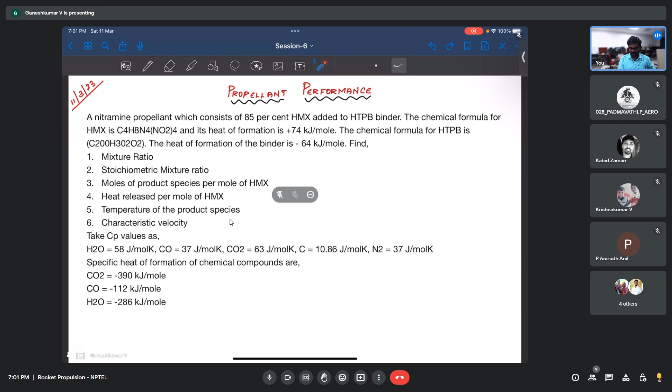I had a talk with the professor, and he gave me a few explanations, which I will share with you. It looks like all three questions are right, and whatever we thought is also right. There are some tricks they followed while making the questions, so it got a little tricky when we looked at it. Let me quickly go through these questions.

So first is question 22, I believe, about the thrust. Let me explain it to you.

The thrust will be maximum when we have optimally expanded the nozzle. So the question actually says the thrust would be maximum in the facility when it has been expanded to optimum expansion through the nozzle, which is 0.02 megapascal.

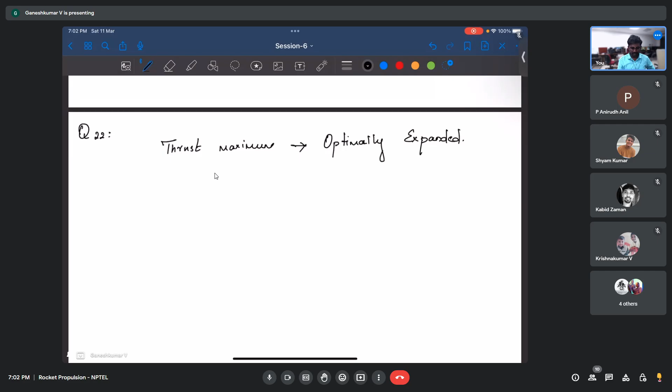Let me quickly show that question also. Yeah, this is week 5, assignment 5. So this is question 22. If you look at it, the thrust developed in the test facility be greater, lesser, or equal to.

Even I tried to attempt it, and it looks like I also got the question wrong. Anyway, the thrust developed in the test facility would actually be greater for optimal nozzle expansion in the facility, which is up to 0.02 megapascal, than if we had an over-expanded nozzle. That is what the question is about.

That is the intention of making the question. It's about the adaptive nozzle. If you adapt the nozzle such that your exit pressure is equal to 0.02 megapascal, you are going to get greater thrust. So greater is the correct answer. But there is this issue that this is designed for optimum expansion for an ambient pressure of 0.01 megapascal. It is already designed.

And in this particular question, it asks would the thrust developed in the test facility be greater, lesser, or equal. There is no mention of whether it is optimal or anything else. So we will be confused. It has, yeah, you are right, it could have been stated better.

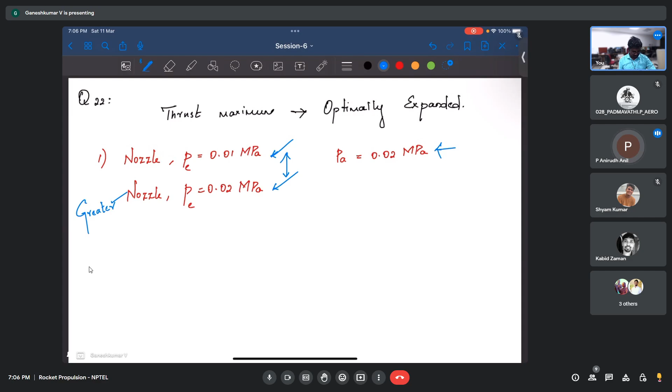Could you explain it using the equation of thrust? Yeah, so thrust equals m dot into Vj plus (Pe minus Pa) times Ae. This is the thrust, right?

So let's say this is the first case and this is the second case. For the first one, thrust is m dot into Vj plus (0.01 minus 0.02) times Ae. For the second one, it's m dot into Vj plus (0.02 minus 0.02) times Ae. Comparing these two, which is going to be greater?

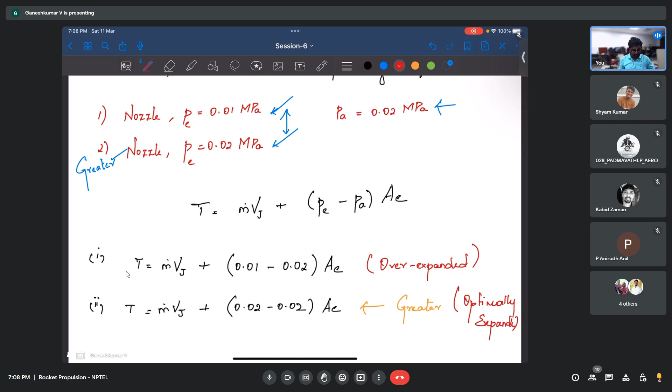Because this one has optimally expanded and this one has over expanded, the over expanded thrust is going to be less. Does that make sense? Yes. So greater is the correct answer for the optimally expanded case. I agree the wording should be corrected a bit, but I don't know whether it can be changed - that's up to the professor. But what's actually meant is that at the end we are comparing the overexpanded thrust with the optimally expanded thrust.

So would the thrust developed in the test facility be less than, greater than, or equal to the thrust produced for the optimal case? We are comparing the overexpanded thrust to the optimally expanded thrust. The overexpanded thrust should be less than the optimally expanded thrust. Yeah, the entire wording doesn't quite make sense - that's why I made that comment.

The wording is not quite explicit. It doesn't read like a fill-in-the-blank statement - it's more like a question, asking would the thrust be developed. So you are right, the wording should be corrected, but if you need marks for that, you may need to make a request.

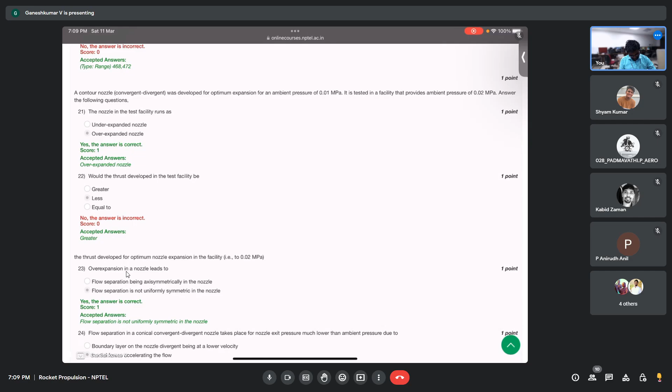But the underlying concept you should be clear on: only for optimal expansion are you going to have greater thrust. What would be the comparison with the under expanded case? Can you add that please?

So let's say if you have an under expanded nozzle, what happens is this term is going to be positive - let's say you are expanding till 0.03 megapascal. This pressure thrust will be positive, but you have to note one more thing: the Vj doesn't remain the same for all these cases.

In fact, for over expanded and optimally expanded, Vj will also change. Over expanded is trickier because there's going to be a shock which reduces the overall thrust by a large amount, since after the shock you get subsonic or lower velocity flow. So for an under expanded nozzle, you're also going to have less thrust because of the velocity.

Let's say for the same exit pressure, if you look in terms of efficiency - how much you converted the chemical energy to velocity or kinetic energy - the under expanded case didn't expand fully to the ambient pressure. So Pe by Pc is not sufficiently low enough, which is why Vj is low enough. So if you just look at this equation, you might think under expanded gives greater thrust, but that's not the case because Vj also gets affected.

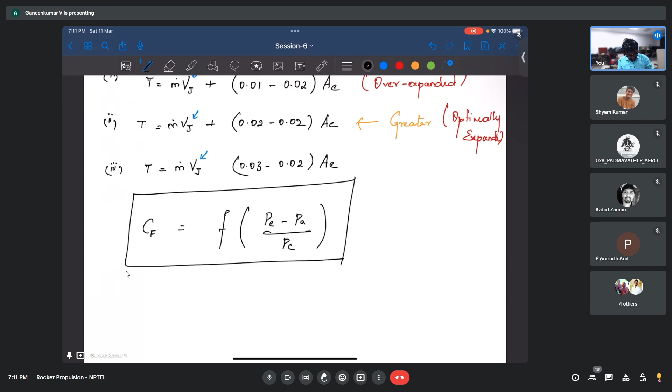What you have to consider is the thrust coefficient, which we derived - it's a function of (Pe minus Pa) by Pc, plus additional terms. This hasn't been covered, so if you're interested you can look it up. If you optimize this thrust coefficient and plot it for varying pressures, you'll see only optimal expansion gives higher thrust. Even if it is under expanded, you lose some pressure because you didn't effectively convert all the chemical energy.

That is something which has not been derived in the class, and you can go ahead and derive it.

So in this course, CF has been defined as some sort of transfer function. C star is a transfer function. What is CF? CF is... thrust is nothing but... sorry, CF is m dot by PCAT, if I remember correctly.

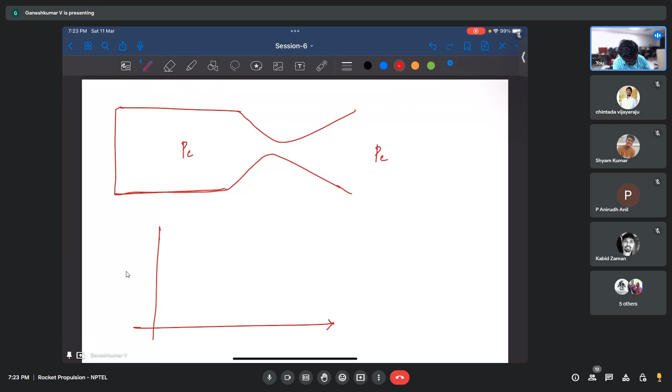Okay, there will be, to have a choke flow, if you plot that graph, this is where actually I'm coming. This is m dot, this is PC by PE, right? So in order to have choke flow, it's going to be like this. This is how it varies. So if you have this as P by PC, actually.

So as and when this pressure decreases, to quickly answer your question, it depends on chamber pressure and the exit pressure, the ratio. So for that, it depends on ratio. For that ratio, you are going to have a certain mass flow rate, a choked mass flow rate. And so what was your question? I lost track of your question.

Yeah, my question was what would determine the PC and TC to ensure that the throat is always choked, or choked during most of the flight? Right.

See, for a given pressure ratio, you are going to have choke flow. You need to make sure that it is not... let's say if you think about it, initially PE is equal to PC. There is no explicit pressure gradient. Yeah, so it is not a pressure value, it's a pressure ratio. That's what I'm trying to say.

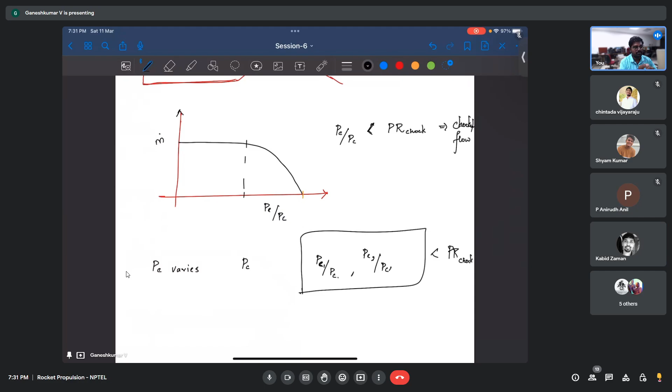And the third is you're concerned with safety, right? So you won't go for over expanded. In case the flow is not choked, the thrust will also be, I think, non-existent, basically zero. It will be totally affected. The velocity would be very less. If it is not a choke flow, your velocity is going to rise like this.

This is the center line, right? It's going to rise and then decrease. You do not want low velocity, you want this high velocity, right? This is not choked. That's why you go for choke flow. You need to increase it as much as possible.

All right, so the second question was the flow separation, right? So it was like we discussed only. So basically, if you compare two flow separation processes, let's say in a conical nozzle, the flow separation in conical convergent divergent nozzle takes place when the nozzle exit pressure is much lower than the ambient pressure, which means there are two cases if you consider.

So PE less than PA. Similarly there is one more which is much less than PA. I'm exaggerating, much less - it's not much less. Let's say PE is 0.5 times PA here, and here PE is 0.2 times PA.

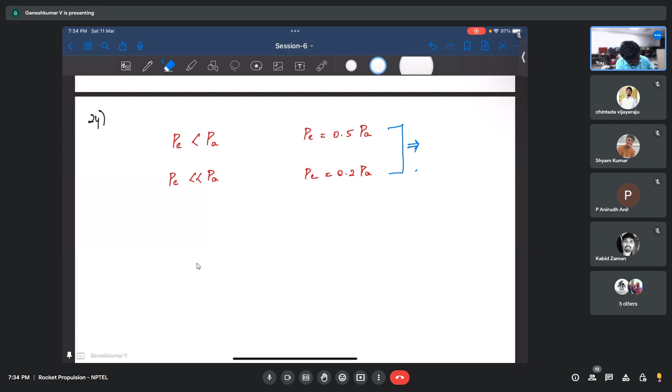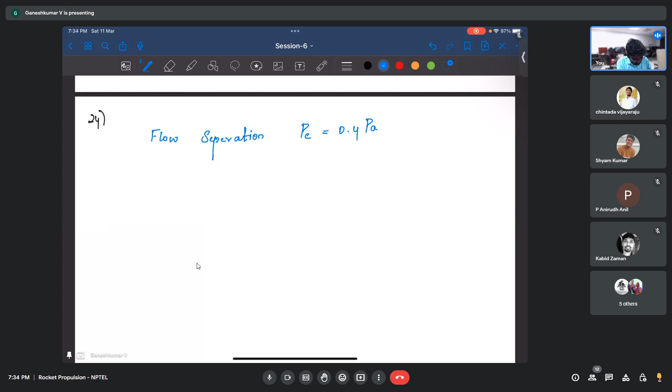Let's say a flow separation happens for one case where there is a Summerfield criteria: PE is 0.4 times PA. That is what the Summerfield criteria tells. So is this for conical nozzle or contour nozzle? It is for conical, I guess. Yeah, conical nozzle. So this is for conical nozzle.

Now, if the flow separation happens, let's say at 0.2 times PA. Let's say if you consider PE is much less than PA, flow separation happens at 0.2 times PA. Then what does it mean?

There is another nozzle which says the flow separation happens for a much below ambient pressure. Flow separation happens for much below pressures than ambient. Then what it means, the inertia forces have actually dominated the flow, dominated the adverse pressure gradient.

So flow separation of conical convergent divergent nozzle takes place for nozzle exit pressure much lower than ambient pressure. Initially there is one ambient pressure which is P less than PA, and for that flow separation happens at some point of time. If you reduce it even more and later flow separation happens, it means inertia forces are actually contributing to delay this flow separation.

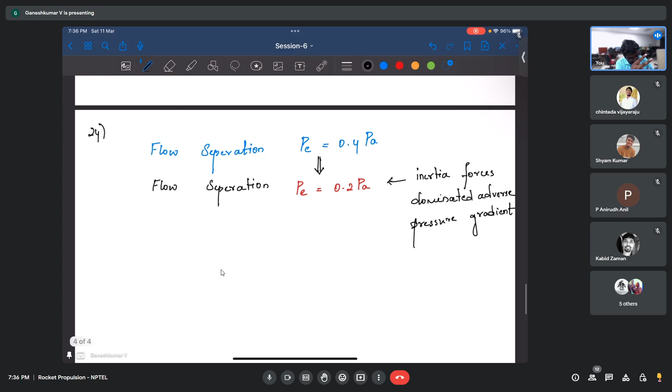So there you need to compare two conditions: one is pressure is lower than ambient pressure. Here you can identify this as PE less than PA, and you identify this as PE much less than PA, which means much lower. So when your pressure is much lower, and at that point if the flow separation happens compared to P less than PA, it is due to the much lower condition having more inertial forces which dominated the adverse pressure gradient.

So that is what you should take from this question. The conical nozzle flow separation takes place for nozzle exit pressure much lower. So again, this is also not well stated, but this is what sir meant.

That's what he said about why it is correct. Actually, sir has given an explanation in which he has also mentioned about this boundary layer not having adequate velocity. So that is true, but this is totally contrary to the answer that has been selected. Boundary layer not having adequate velocity is always present, right? So when a boundary layer does not have adequate velocity, that is what is going to lead to flow separation.

But the flow separation process can be delayed when we have higher inertial forces. That is what you need to understand. So in the boundary layer, you are always going to have low velocity, whether it is high pressure or low pressure, and if your inertial forces cannot overcome it, then only flow separation happens.

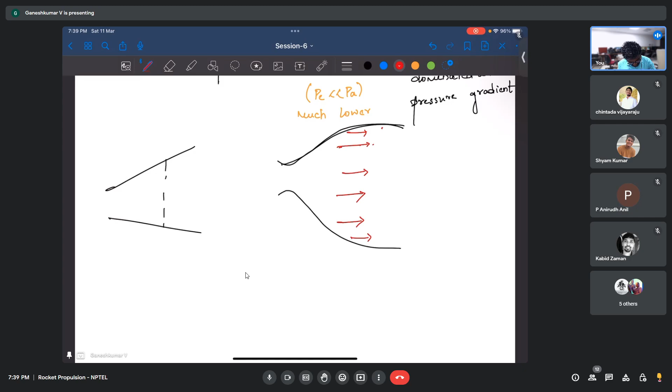Let's say this is the place where PE is 0.4 times PA. Similarly here PE is equal to 0.4 times PA. But there is less chance that the flow will separate here. The flow might separate somewhere here instead. So it has gone below. The reason is you accelerated the flow to a very high velocity.

This is due to inertial forces. It's what actually delays the flow separation. That is the intention for this question. Does that make sense? You need to note this word 'much below'.

So even when PE is less than PA, you are going to have low boundary layer velocity, and if PE is much below also, you are going to have low boundary layer velocity. But when it happens at lower pressure, it means inertia forces have dominated the pressure gradient, or you are going to have higher wall boundary velocity at the places where the inertial forces are dominated, and then you have less chances of flow separation.

Is that making sense? So if the exit pressure is much lower than ambient pressure, flow separation is more likely, or if it is not that low. So when exit pressure is lower than ambient pressure, and there is an over-expanded nozzle, you are going to have flow separation, right? Based on Summerfield criteria or other criteria, there is a pressure where flow separation happens, and it doesn't depend on exact pressure values, it depends on PE by PA.

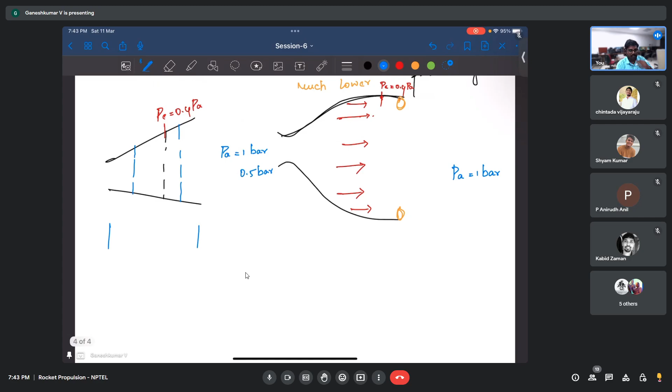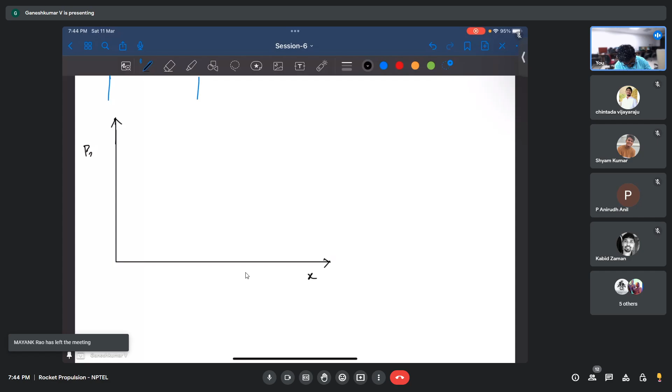Here also ambient pressure is 1 bar, here also ambient pressure is 1 bar, but as per Summerfield criteria, or let's say if you just forget what Summerfield criteria is, if you just plot the pressure, this is along length, let's say this is along x, and then this is pressure, P exit.

So here it is the throat. Your pressure is going to drop till the throat, and then you will continue to drop, and then you will see that there is a high pressure, so you will rise again, and then you will reach the ambient pressure. This is the ambient pressure. So this one is for overexpanded, this is a normal shock. In reality it won't happen, but just for understanding you can think of it like that.

In reality there will be oblique shocks and flow separation happens. This is not a flow separation case. At this point itself you are going to have flow separation. The pressure will rise, but it won't rise like this, and there won't be any normal shock. You will have oblique shocks, and the inward motion of the gases will be happening inside the nozzle itself. All these things will happen, but for understanding you can think of it like this.

Let's say you reduce the ambient pressure, and it will go something like this and then reaches here. So this normal shock gets transferred till it ends here, so at this point it's going to be optimal expansion. Let's say if you keep the ambient pressure constant, and what you are planning to change.

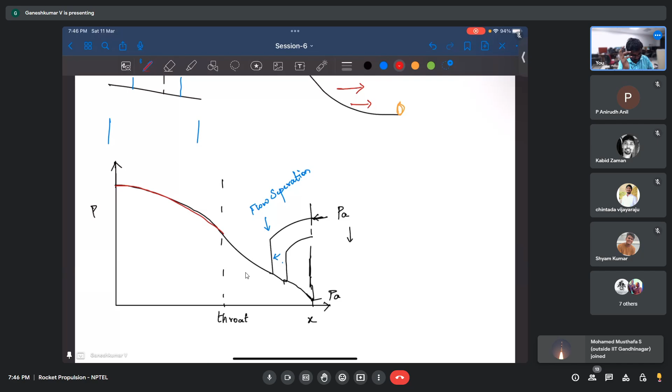If you just look at the divergence, the pressure gradient is going to be large down, right? So at this point it's going to go down, and then flow separation happens, and it will reach the PA. If you look at these two, this is for conical flow separation, and this is contour flow separation. The reason it gets downstream is due to inertia forces which already accelerated.

If you look at it, you have a high pressure gradient, right? So you suddenly expand to a very high velocity within a small distance, and because of that there's going to be high velocity inside the boundary layer, inside the nozzle, and the inertia forces are going to overcome this sudden rise in pressure gradient efficiently. So that's the reason you get delayed, but still there will be flow separation.

At this point, it may not be able to overcome it, that's the reason flow separation happens. But at this point, it has enough inertial forces to overcome the pressure gradient. So here the pressure gradient is like this, which means let's say PA by PCF. This cannot be overcome by conical, but it can be overcome by contour, because of the high velocity we have.

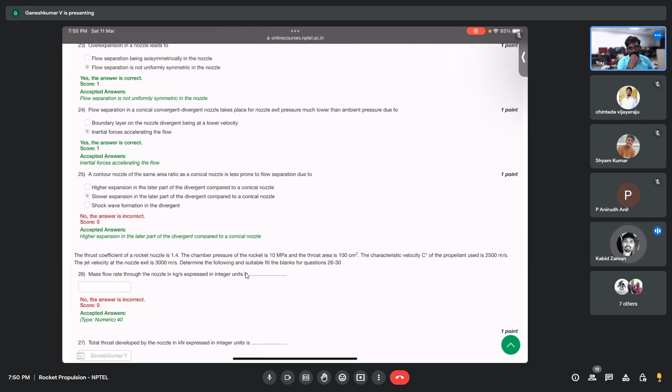Compared between contour nozzle and conical nozzle, contour nozzle can expand to a much lower pressure without going into flow separation, compared to that conical nozzle, right? Correct, correct. Okay, yeah, that is true.

And now coming to 25. By now you should know what is the solution for 25. Like we already talked about, contour nozzle is having high divergence, right? Initially it has high divergence, so the velocity is going to expand more initially, and then there is going to be slower expansion in the later part of the divergence.

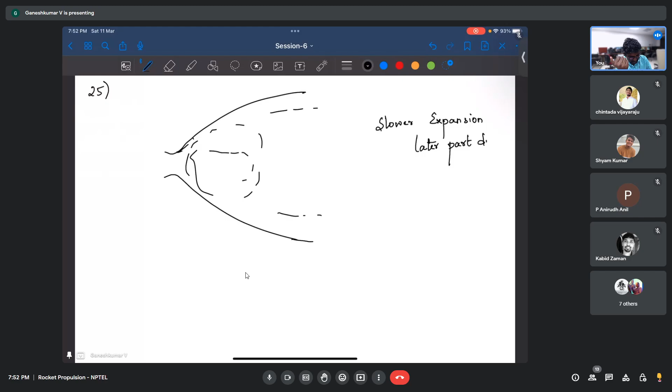So you might probably be wondering, slower expansion in the later part of divergence is the correct answer, right? Yeah. So this has to do something with the boundary layer.

So here you are viewing it in the core region. In the core region, there is going to be very high expansion initially and lower expansion in the later part of divergence, right? But in the boundary layer along the walls, there is going to be...

Initially, if you look at the boundary layer, let's say with a zoomed in view, the boundary layer is going to be small, and suddenly you have expanded to a very high velocity. So your u infinity is going to be very high. So the boundary layer will get adapted to this higher expansion much later. This is the reason: if you have higher velocity, you are going to have higher expansion, right?

But this higher velocity is going to get achieved inside the boundary layer at the later part of the divergent, rather than in the initial part. So in the core region, higher expansion is at the initial part, but inside the boundary layer, the dynamics is a little bit different. To simply explain it, the higher expansion happens at the later part inside the boundary layer. So that is the reason higher expansion is the correct answer.

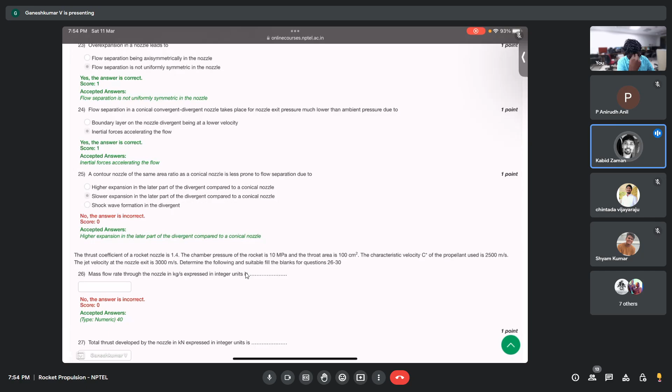But in this particular question, there is no mention of boundary layer or core flow. Exactly, so that is totally confusing. What I'm also wondering is they didn't state which region we are talking about. And even in the lecture, we have not discussed anything related to boundary layers, the growth of boundary layer, or the expansion in the boundary layer.

I have kept the flows to be almost similar between boundary layer and core flow, since we are mainly dealing with the core flow only. In fact, all this flow separation analysis, if you want to talk about in detail, you have to do a 2D analysis. You cannot have a 1D analysis. The 1D analysis just gives the center line velocity, or let's say the equivalent velocity or averaged velocity along a cross section. It doesn't, in 1D you cannot even consider the effect of viscous forces.

When you talk about boundary layer, you need to consider the effect of viscosity, right? So we never did a no slip condition at the wall, walls of the nozzle. So when you talk about flow separation, or when you talk about boundary layer, you need to do a 2D analysis. You need to come up with a 2D analysis. Until we do 2D analysis, we won't be able to exactly say which is better, right?

So in this course, it has not been taught, or it has not been discussed much. But the reason for this to be the correct answer, that is what he said. I'm not sure about how the grading or how it will change, or how you want to go forward with it. Only the professor can decide that. But yeah, I'm just giving you a physical insight, like why it is the right answer.

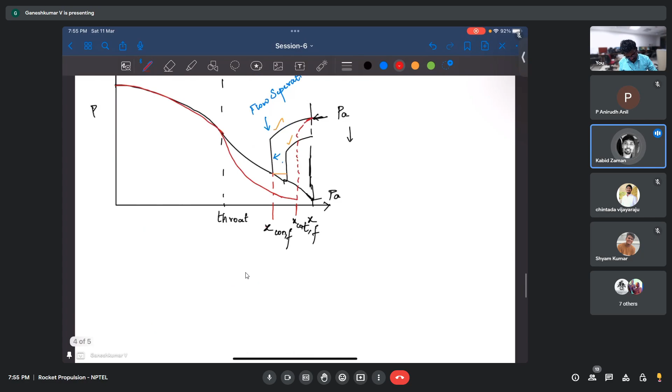So in the core flow, initially there will be more expansion because there is a large deflection of 10 to 15 degrees, and thereafter it is 4 degrees, so it is less expansion, right. So here we saw, there is a high expansion here in this graph.

If you look at it, even if you go back and look at the professor's lecture, he will draw the graph like: if a conical nozzle is like this, the contour nozzle is going to be like this, which means there's a higher expansion initially in the core flow. Actually I made the answer based on that graph only, because that makes sense. I also made the answer based on that, and my answer is incorrect.

Could you please explain that boundary layer expansion once again? Like why it is less at the beginning part and more at the later part?

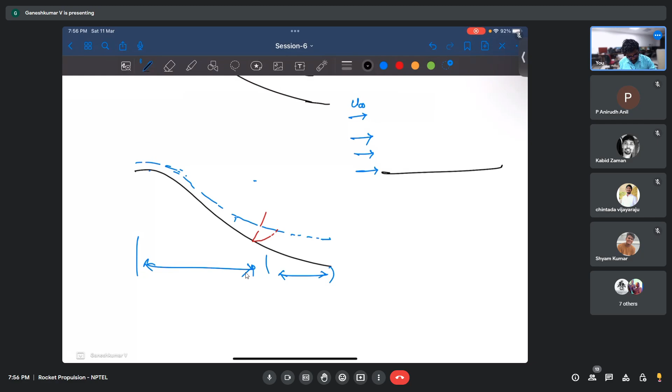So when we do a boundary layer analysis over a flat plate, we considered a lot of assumptions, right? We considered velocity at the far field to be u infinity, and we used to draw a boundary layer like this. But here you cannot make those assumptions. U infinity is a function of x, it keeps on varying, right?

So initially there will be a boundary layer. At the throat there will be some boundary layer, and suddenly you have expanded it to a very high velocity, and the fluid in the boundary layer needs some time for its expansion, because adjacent to the wall the velocity is zero, right? So you cannot change the wall velocity.

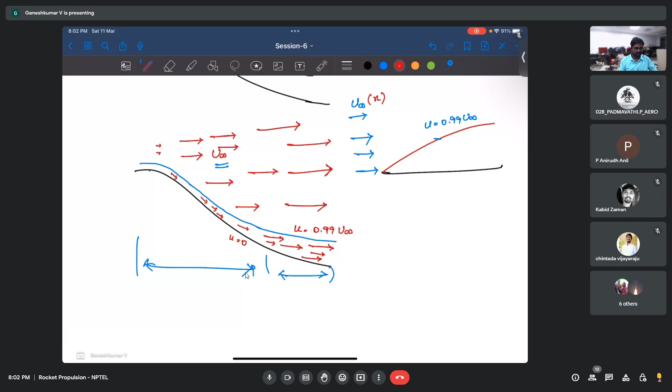Okay, thank you. Is there any other questions regarding last week's assignments or previous weeks' assignments covered till now? In one of the week 6 assignment questions, there was mention of a specific heat ratio, but the answer chosen as correct is specific heat instead of specific heat ratio.

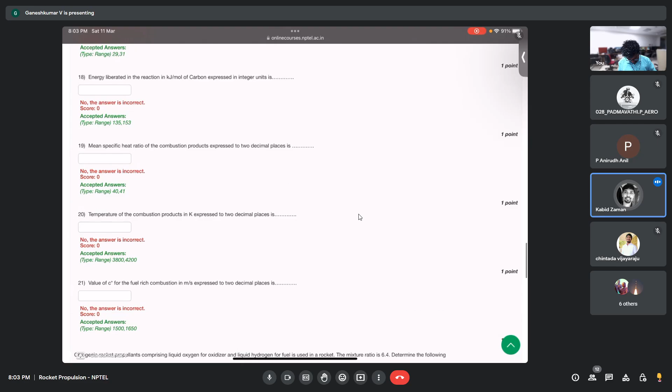Did you look at the solutions? In the solution, it is also giving specific heat ratio, but the answer given is specific heat instead of that ratio. That's not a problem - in the solution you were right, when you see the solutions. No, in the solution also that ambiguity is still there. Let me check - so this is question 19, you're saying it should be specific heat ratio. Let me check it.

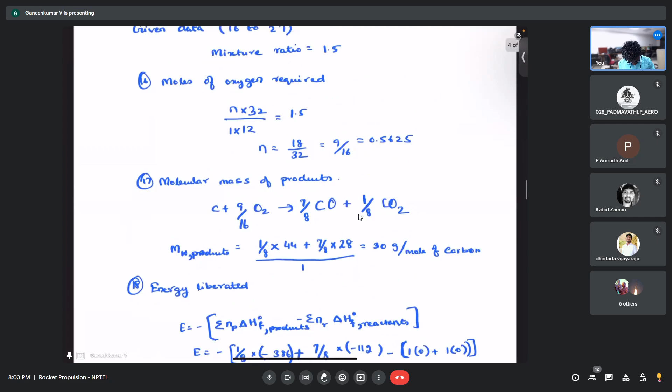Did you raise the issue about it? One of the students, Lakshmi, has raised this issue. Did they get any reply for that? Not yet, I guess. Okay, so that should be corrected.

It's not a problem, it was clearly stated, right? It should be corrected. Question 19 is asking for specific heat ratio, but the answer is a specific heat. So that is ambiguous. But what about 12?

Question number 12, well, it is mean specific heat of combustion. It has given combustion specific heat, right? It's just saying mean specific heat. So do we consider constant pressure or constant volume? It is not mentioned exactly.

Usually we deal with only CP, right? So we should use CP.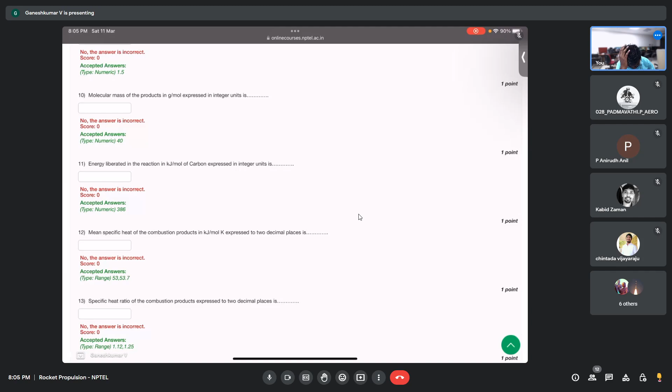Sir, in this 12th question only, the answer is like 53 point something, from 53 to 53.7. That will be in joules. For kilojoules, it should be 0.05. It's given in kilojoules, no? So please make that request also, it should be corrected if possible.

The solutions also give 53 joules, right? Yes sir. Then it's fine, no problem.

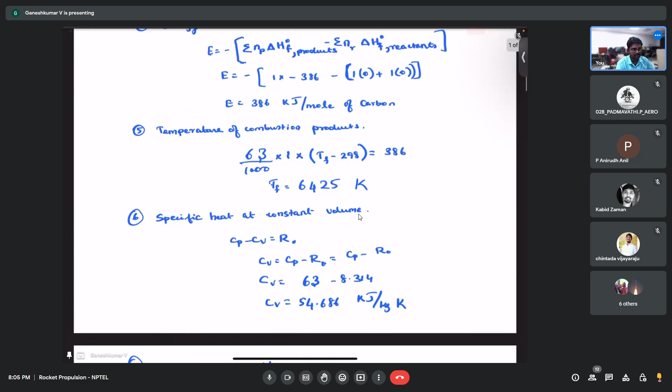So basically to answer the question, mean specific heat is nothing but CP only, you should consider, because CP is what we use everywhere. So usually people drop out the term 'pressure' for constant pressure.

Actually, I saw this 'mean' thing, and I calculated the mean of CP and CV, and that came out to be wrong.

So which one, 12th question, right? Yeah, it is asking for mean specific heat. So I made the assumption that it must be a mean between CP and CV, because neither pressure nor volume is mentioned.

There I made the mistake. It's just mean specific heat is for the product species, it has nothing to do with CP and CV. See, we never have both CP and CV in the same equation, right? If we solve for enthalpy, we will have CP. If we solve for internal energy, we will have CV. So there's going to be nowhere you will use CP plus CV by 2.

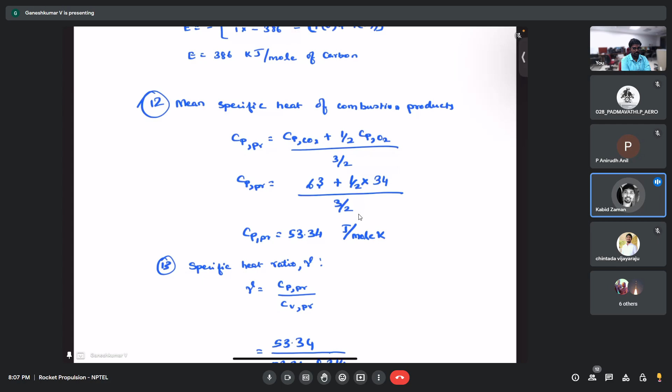So mean in the sense that it is a product mix, specific heat of combustion products, right? So combustion products specific heats mean you need to take.

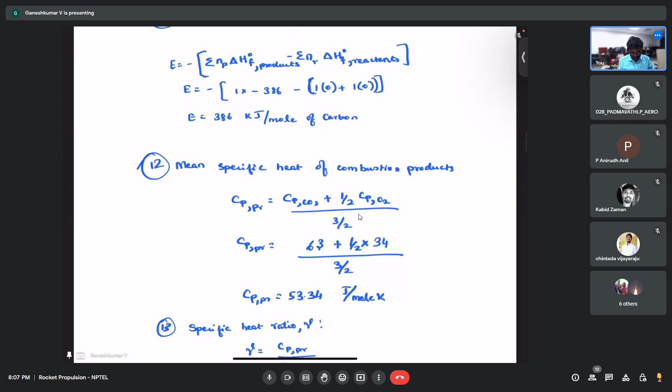All right, any other question?

All right, I think I have one more question here to solve today. I saw assignment 7, I believe it's 7, it was again to calculate the temperature and characteristic velocity of a given propellant. I thought in the last class we rushed a little bit in the later part of the session.

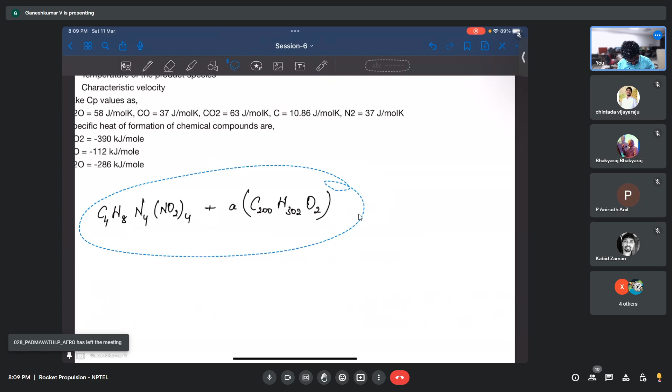Exactly, CO, sir. How do we estimate that? Right, so you have a fuel and oxidizer, and you consider an ideal set of products. So upon combustion, what is the product species you are going to get? You will be getting CO2 and H2O, right? This is the major product species because it's a hydrocarbon, and you are going to get CO2 and H2O.

And sir, since we are considering stoichiometric? No, we didn't consider it yet, but first case, what you can say is in a stoichiometric, you are going to have an ideal set of products. First you consider ideal set of products, and you try to equation, and in addition, you consider all the species.

So in fact, if you do an equilibrium analysis, if you take a combustion course, we would never do this. What we write is, if you want to do this combustion and get the product species, this is going to give us CO2, CO, H2O, H2, O2, H, O, N2, N, OH, H - what else I missed? N2O, then NO2, and what else can we add? We can keep on adding. It's like you can have n number of product species.

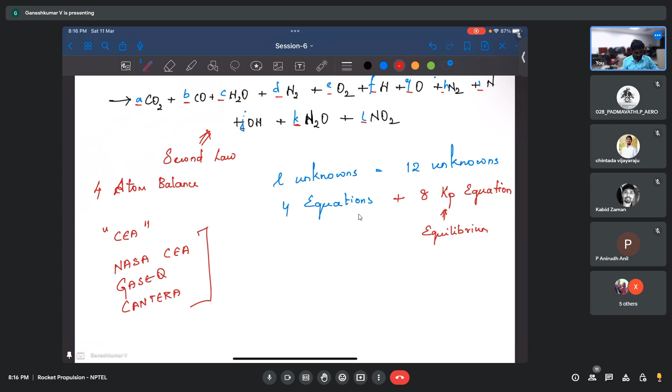Instead, what we did is we are going to take a workaround for this. We won't consider, let's say, O2, H, O, and then N2, NO2, N2O, OH, CO. If needed, we will consider this CO. If needed, we will consider O2. If needed, we will consider N2.

We won't consider dissociation at all, so dissociation is completely neglected. But dissociation is totally going to affect your system if you have high temperatures. We are just taking a workaround in order to get a rough estimate. That is the reason we do this. Do you have any questions?

Is this clear why we are doing this? This is how you properly calculate mole fraction of each and every species. You have to consider all the species available, because you don't know what happens at the end of combustion.

Nature is not bound to give only CO2 and H2O. It works on its own ways, and it is governed by only a few laws, like the first law of thermodynamics, second law of thermodynamics, and conservation principles. So you need to come up with some idea of using these conservation principles in order to predict what will be the mole fractions.

So we won't go into these complications. What we do is we just consider... let me just draw it again. So I just want to make sure this is not the correct way of doing it, but we are just doing a workaround in order to solve it, right?

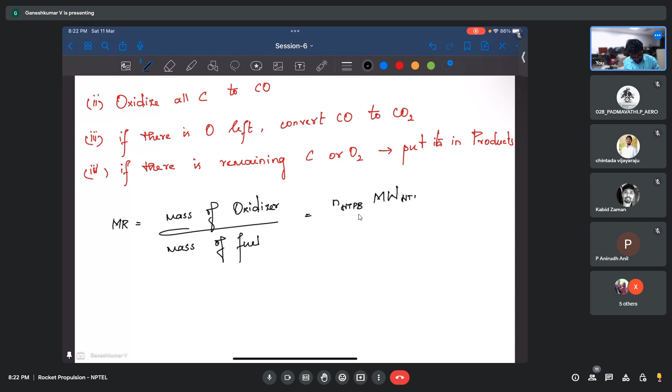Here you consider HTPB to be oxidizer and nitramine to be fuel. So you need to find N of HTPB times molecular weight of HTPB, by N of HMX, molecular weight of HMX.

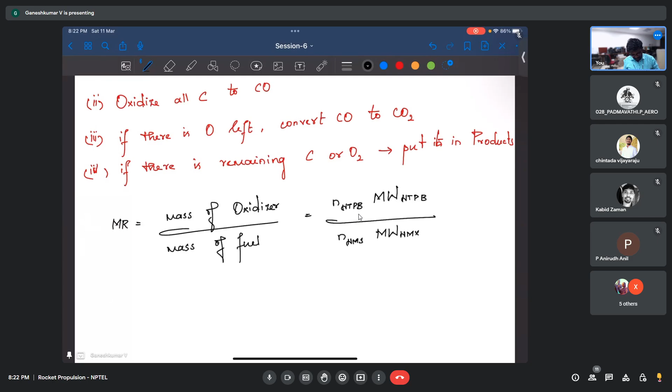Let's quickly calculate molecular weight of HTPB. How much is it coming? It's C200, H302 and then O2, I guess. Yeah, O2. So 200 times 12 plus 302 times 1 plus 16 times 2. So is this clear what I'm doing? How I'm using mixture ratio to find the number of moles?

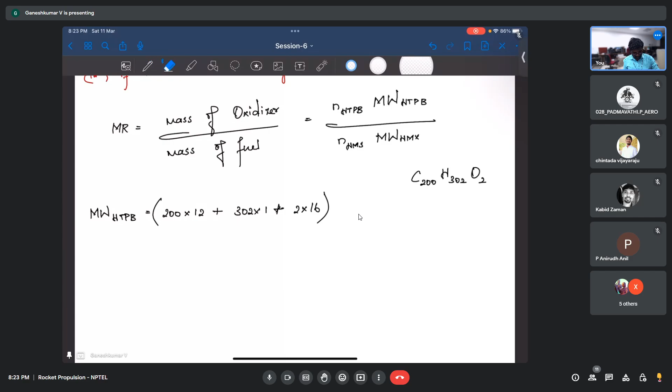Okay, 2734, we have the answer, 2734. What is it going to be? Because when you substitute it elsewhere, you need to convert into kg per mole, which you need to take care of. And then similarly, if you want to calculate HMX, how much is it going to be? By the way, if you have doubts till now, please stop me and ask.

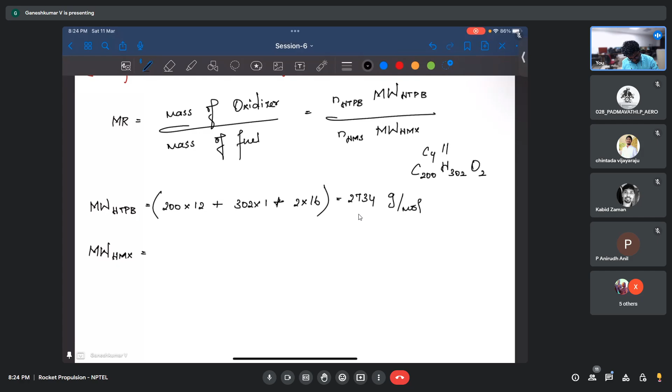It's going to be C4H8N4(NO2)4. Which is it coming to? So it's going to be 4 times 12 plus 8 times 1 plus 4 times 14 plus 2 times 16, right? How much is it? 296. I believe this is right. Yeah, 296 is right.

How do we find n of HMX? So here if you look at the question, everything is per mole of HMX, right? So let's take 1 mole of HMX. It's also best to have 1 mole of HMX and do all the calculations. So we already took 1 mole of HMX, so n of HMX is going to be 1. Now the mixture ratio is given. Oh, is it not given? So we need to first calculate mixture ratio also.

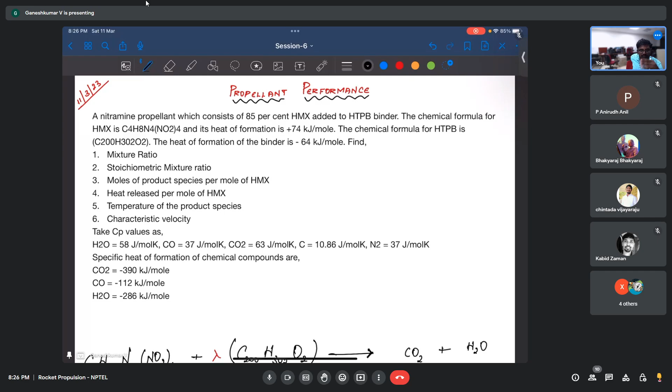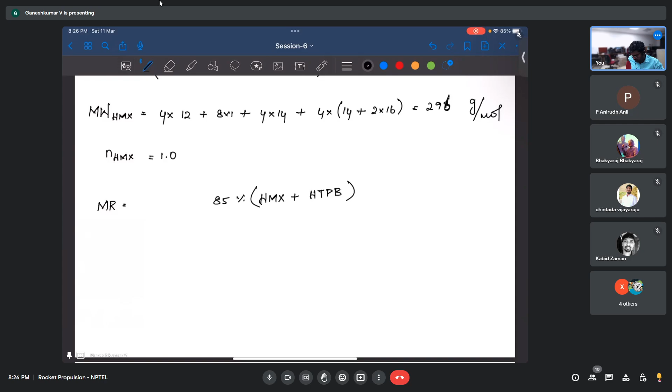It's given 85% is HMX, and remaining is HTPB binder. 85% of HMX added to HTPB. What the question says is it consists of 85% HMX added to HTPB binder, right? So 85% is HMX and remaining 15% is HTPB. So how do we calculate mixture ratio? Is it 85% of HMX plus HTPB, or 85% of HMX added to HTPB?

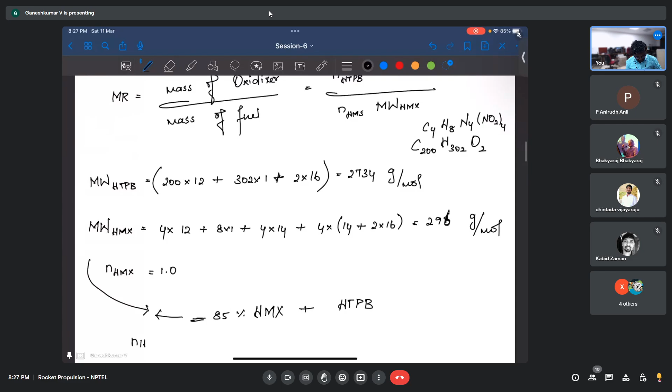So we don't need to calculate mixture ratio also, or if you want you can calculate. I just want, how do we convert this information, whatever information we have, into n of HTPB? That is what I need. How do we calculate it?

Let's say if I want to give a hint, you consider 1 kg of propellant. In that we have 85% HMX, then 15% HTPB.

Which one is the oxidizer here? So HMX is fuel here and HTPB is oxidizer. You can assume it to be like that. In fact, if you calculate in terms of oxygen, it depends on mixture ratio. Based on that, fuel oxidizer varies. It doesn't matter right now, but how much of HTPB I need, how much of HMX I need for a given mixture ratio. Now you consider HTPB to be oxidizer and HMX to be fuel.

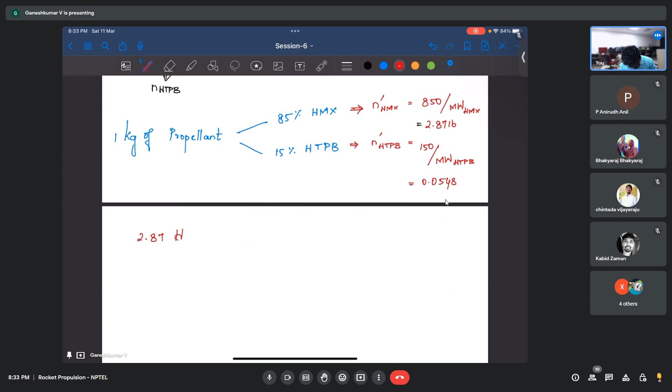So 2.87 moles of HMX reacts with 0.05 moles of HTPB. That is what this 85% and 15% is corresponding to, right? Then let's write it: 2.87 moles of HMX reacts with 0.0548 moles of HTPB.

Then I want to have 1 mole of HMX. If I have 1 mole of HMX, it reacts with 0.0548 divided by 2.87 moles of HTPB. So we know N of HMX to be 1, we consider it N of HMX, for which we are going to do all the calculations. And now we have N of HTPB, which is nothing but 0.0548 divided by 2.87. This is how you calculate moles of HTPB.

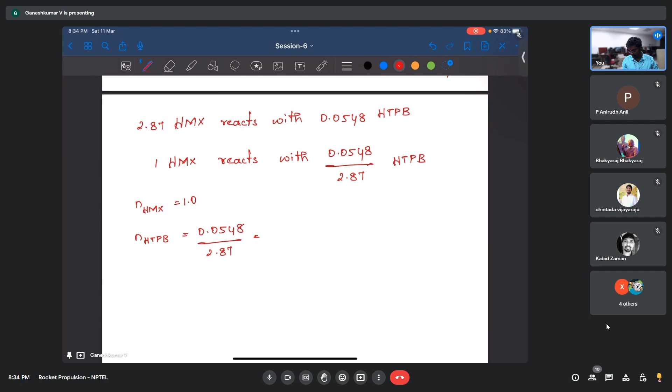Is this clear? It comes from the mixture rule, right? So what you know is the mass ratio of oxidizer and fuel. Based on that, you need to calculate the N moles. Which it is coming out to be... I'm getting 0.019. Is that confirmed? Yeah, it's correct. Is this clear how we arrive at this result?

Is there any other way you could arrive at this result? How about if you write mass ratio to be mass of oxidizer by mass of fuel? Can we just simply divide 85 and 15 percent, 15 divided by 85%? It is giving the same result. Yeah, that is also true. You can try like mass ratio, nothing but 0.85 to 0.15. Is that what you're telling? Yeah, exactly, so this is a mass ratio.

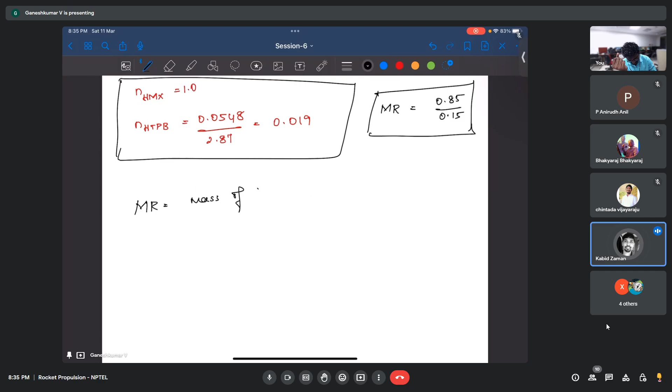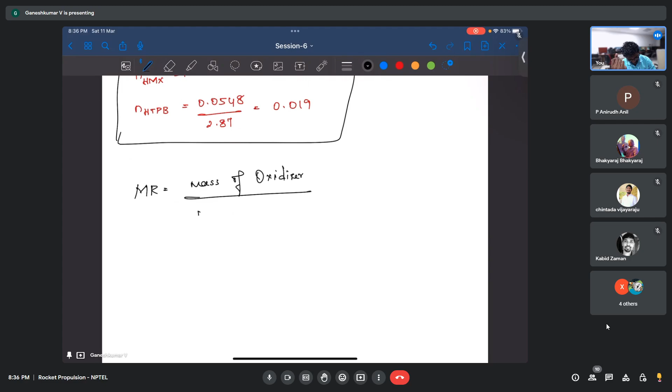In fact, mass ratio for this reaction. But I didn't get why 0.85 upon 0.15. See, what is mass ratio? It is the amount of oxidizer to the amount of fuel. It should be the reciprocal of that actually, 0.15 divided by 0.85. So in order to answer your question, it's mass of oxidizer divided by mass of fuel. What we know is mass of propellant is nothing but mass of oxidizer plus mass of fuel.

Yes sir, so I am telling 85% of the propellant is oxidizer, sorry, 15% of propellant is oxidizer, which is 0.15 times mass of propellant. And I'm telling 85% is fuel, so 0.85 times mass of propellant. Now what happens? Mass of propellant cancels. Okay sir, got it.

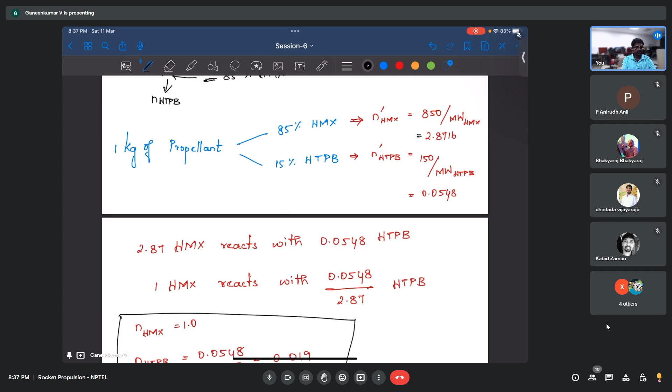So you can simply do this N of HMX, and you can end up getting the moles of HTPB also. This is also a way, but if you want to think a more logical way, you can also do it this way. You can take 1 kg of propellant and see how much division we have in terms of moles, and that is going to be applicable for any mass of propellant.

Anyway, so we found that out, now let's try to balance it. That is important, right? So we need C4H8N4(NO2)4 plus 0.019 times C200 H302 O2. Okay, now what did I say? I need to first oxidize all the H2O.

So first let's try to find out what should be the coefficient of H2O. So I have how many H atoms?

H atoms: I have on this side 8 H atoms plus 0.019 times 302 H atoms. Is this clear? So that gives 13.738, okay, so around 13.73 H atoms.

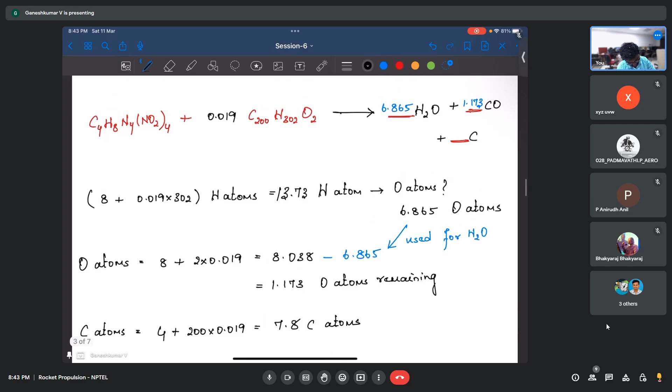So in this 7.8 carbon atoms, I'm going to subtract 1.173 atoms to form CO. So the remaining would be, how much would be remaining? So 6.627. Yeah, wonderful, so we have 6.627 carbon atoms remaining.

Okay, and so this is going to be 6.627. You need to note that we are eliminating the oxidation of N, like N is an inert species here. It doesn't oxidize, it doesn't react to form product species like NO or N. In reality it does, that's where NOx emissions and emission rules come from, because NO will be produced, but for our analysis we'll just ignore the oxidation of N.

So what will be the moles of N remaining? Because we have N here, right, so there should be N on the product side also. So how many moles would be remaining? We have 4N here and then another 4N here, total 8. Is this clear?

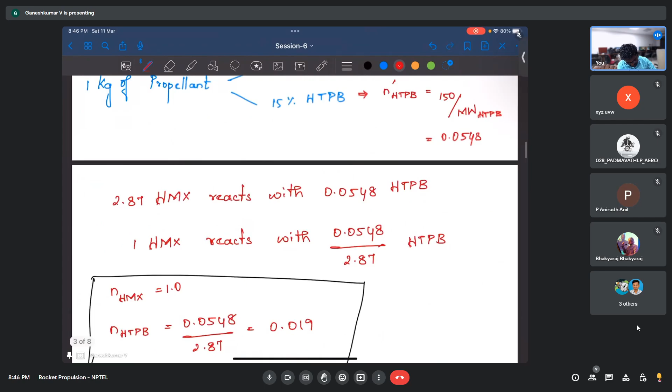So, of HMX that we need to find out, what is the heat release per mole of HMX, or you can say the heat of combustion. It's called heat of combustion. What is the heat release per mole of HMX? What is the formula for that?

It's going to be the summation over reactants of Ni, H naught F of Ni — summation over reactants, N of reactants, where i is the reactant, and H naught F of reactants — minus summation of Ni for products.

You remember this formula? It's just formation enthalpy - the difference in formation enthalpy upon forming this at a constant temperature or standard temperature of 298 Kelvin. That's why all these Cp's will disappear, because you no longer need to raise the temperature from 298 to some other Kelvin.

So when you calculate the heat of combustion for any reaction, you need to calculate how much heat is released at constant temperature and pressure, in this case 298 Kelvin and 1 atm pressure. The definition of enthalpy of combustion, or energy released per kg of propellant or fuel, is always at these standard conditions, and that's why we use formation enthalpies here.

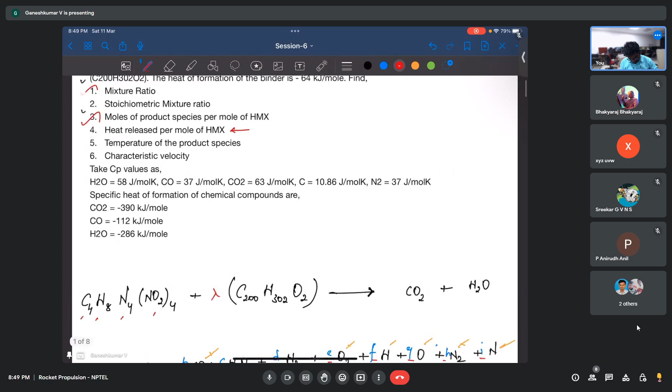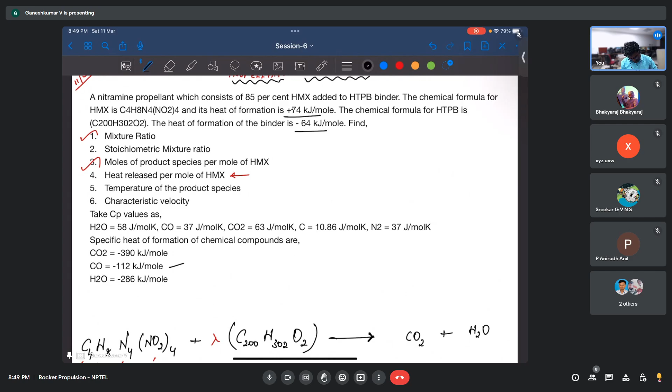Then you can calculate it. It's going to be HMX - how many moles of HMX do we have? We have one HMX and 0.09... HMX is plus 74, plus 0.019 times HTPB which is minus 64, times minus of moles of H2O.

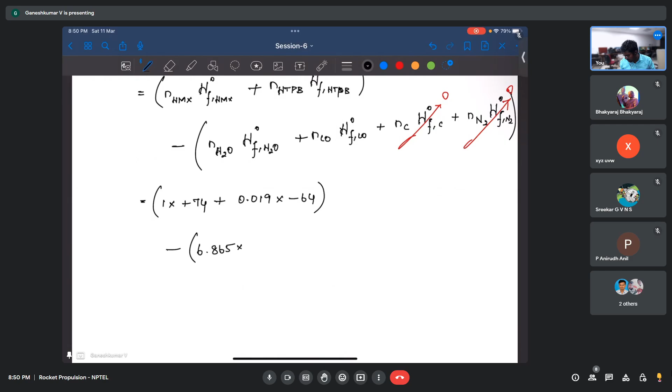How many moles of H2O do we have? 6.865 times moles H of H2O, which is minus 268 - I guess minus 286 - and CO is 112, minus 286, then minus 112. How many moles of CO do we have? 1.173.

Okay, can you guys quickly calculate delta HC? Then next is temperature, which is delta HC you're getting. Calculate it.

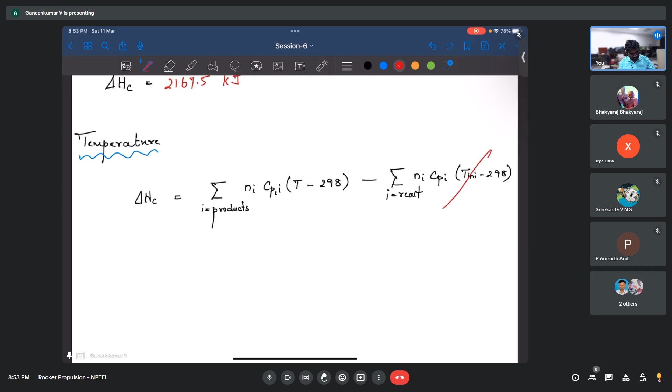Ni of Cp, T minus 298, plus minus summation over reactants, Ni Cpi of... so the initial temperature T initial minus 298. Here we will consider initial temperature to be 298 only, so this part is going to be 0, so this whole part would be 0. So this equation simply simplifies to delta HC, which we already know, 2167.5 times 10 power 3.

It's nothing but N of H2O times Cp of H2O times T minus 298, plus N of CO, Cp of CO times T minus 298, plus N of C, Cp of C, T minus 298, plus N of N2, Cp of N2 - so why is it 0? That's the reactants.

Yes sir, here the initial temperature is already at 298 - because it is already at 298, T initial we are assuming it to be 298 Kelvin. I think I didn't give it in the question, but the initial temperature is actually 298 Kelvin, all the propellant is at 298 Kelvin. That is the reason this is 0 - if not, you would need to consider that.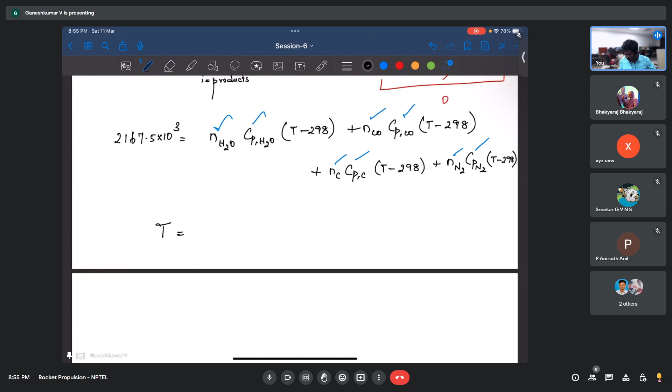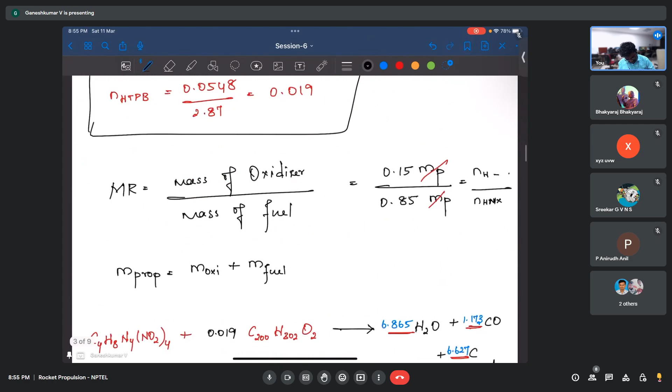So you know all these things - you know N, you know Cp, all the N's and Cp's, which is also given in the question. You just need to find temperature here. Again in the interest of time, I am giving you the temperature - please cross check it, I didn't solve for temperature, you can solve and let me know what it is. Then remaining is characteristic velocity - once you find temperature, what else do we need to do to find characteristic velocity? We already covered this in the last lecture, last session, right?

Characteristic velocity requires, it's actually a function of molecular weight, temperature, and gamma. All these three you need to calculate. So for that you need to know the molecular weight. How do you find the molecular weight of the mixture?

N of H2O times molecular weight of H2O, plus N of CO times molecular weight of CO, plus N of C times molecular weight of C, plus N of N2 times molecular weight of N2, divided by N of H2O, N of CO, N of C, and N of N2. This is how you calculate molecular weight.

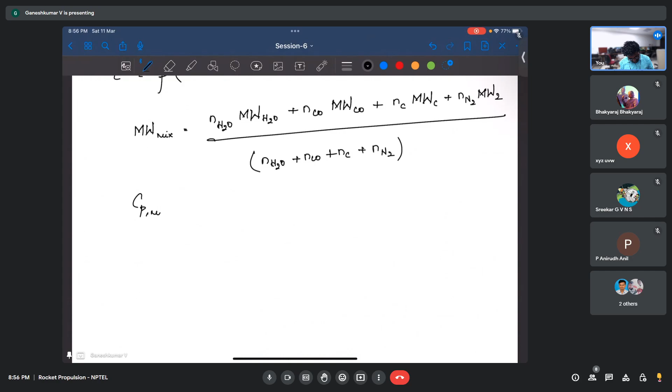Similarly, you need to calculate Cp of mixture, and then you know R. What is R? R is nothing but R naught divided by molecular weight of mixture. Once you find that, you can find Cv of mixture, which is nothing but Cp of mixture minus R. Gamma is nothing but Cp of mixture by Cv of mixture.

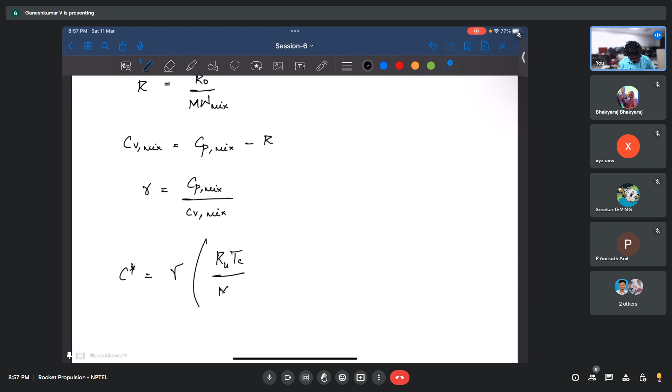Once you find all this, you can put it into the C star equation, which is going to be a function of all these. I believe there's a big capital gamma times, I think it's R T C, or R naught T C by molecular weight, to the power gamma plus 1 by 2 times gamma minus 1. I'm not sure, please recheck this equation again.

Okay, there's no gammas here, it's just 1 by 2, root RTC upon capital gamma. So it is root RTC upon capital gamma. It's 1 by 2 I wrote, but yeah, both are the same.

And this capital gamma is going to be square root of gamma, times 2 by gamma plus 1, to the power gamma plus 1 by 2 times gamma minus 1. Sure, the capital gamma is in division with the root RTC. Is it? Okay. Yes sir. Now is it fine? Yes sir.

Just need to find all these things. So the only first important thing, if you make a mistake, is if you make a mistake in calculating the number of moles, then all other calculations will get affected. So you need to be very careful in doing this calculation.

It's just balance, how much O you are going to put here, how much O you are going to put there. It's like filling the bottles - first I will fill the smaller bottle, then I will fill the bigger bottles, like that. Initially you fill everything with H2O, fill everything with CO. If remaining is there, you put it in CO2. If nothing is remaining, then you keep it as O2.

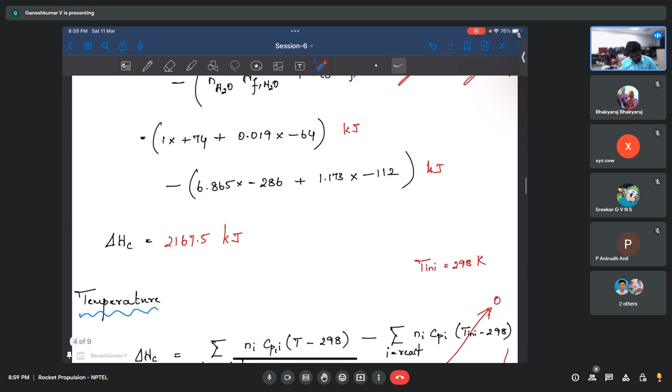If I don't have enough O to oxidize CO, keep it as C, right? If I cannot even oxidize H2, H also appears as H2 on the other side. So that is how your thought process should be. Once you do that, all these things are trivial, you just need to calculate all these things.

Is that clear? So maybe I will take 2 more minutes to find how do you find stoichiometry. Stoichiometry, I think the spelling is right. Anyway, so if you want to find the stoichiometry, what does stoichiometry mean? You need to consider the ideal set of products. So here we have C4 H8 N4 (NO2)4,

plus some lambda of C. This is lambda stoichiometric, let's call it lambda star, times C200 H302 O2. It should give you the ideal set of products in a combustion reaction. What is the ideal set of products? It should give you CO2, it should give you H2O, and it should give you N2. There shouldn't be any other dissociation of the products or anything else. The ideal set is CO2, H2O, and N2 - it's not even CO.

So now if you just balance the carbon atoms, let's say if you want to balance carbon atoms, it's going to be 4 plus lambda star times 200 is equal to, let's call it A, B, and C. Okay, now we have A.

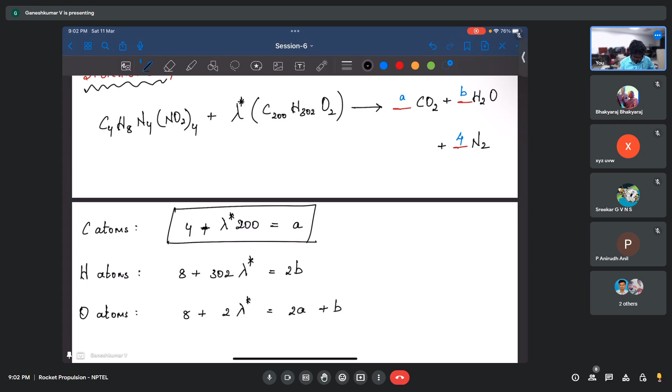So for the H atom we will have 8 plus 302 times lambda star is equal to 2 times B. And then now we have the O atoms. O atoms: we have 8 plus 2 times lambda star is equal to 2 times A plus B. Now you have how many equations? 3 equations. And what are the unknowns we have?

So it's just an algebraic equation, and the unknowns are A, B, and lambda star. You can easily solve these two and get lambda star. Once you get lambda star, you can find the mixture ratio, stoichiometry.

Okay, so this is how you find it. I just thought I'd give you some interesting insight about stoichiometry. So once you find the stoichiometric mixture ratio, you can compare it with the present mixture ratio. Let's write it out. What is the present mixture ratio?

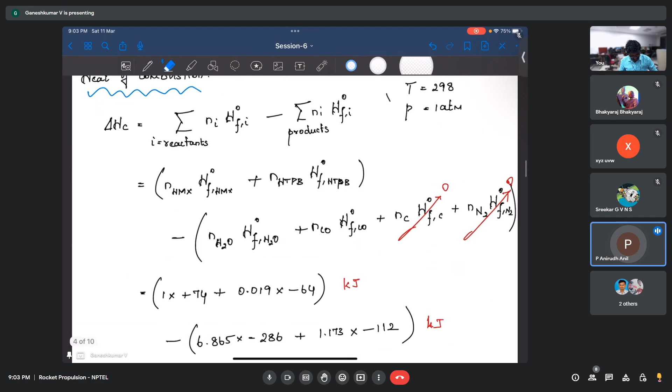So could you explain again about stoichiometric? Yeah. So in stoichiometric, what happens? We have an ideal set of products, right? Is that clear? In stoichiometric, we will have an ideal set of products. We won't have any dissociations. Like CO2 cannot dissociate into CO and O2, or H2O cannot dissociate into OH and H. Okay, that you should remember.

And the ideal set of products are CO2, H2O, and N2. So let's say if you have a perchlorate, ammonium perchlorate, the ideal set will also include HCl in addition, because chlorine is there. So CO2, H2O, and HCl - the ideal set becomes that.

Now what you have to do is just balance these. You don't need to do anything else. You don't need to oxidize CO2 first, or oxidize H2O first. All these things you don't need to do, because you don't know what lambda star is, so you can't do that either. You're thinking that if I want to form this ideal set of products, how much oxidizer do I need - that is going to give you lambda star.

So what you do is form three atom balance equations. You form three equations, and you have A, B, and lambda star - three unknowns. This you can easily solve, right?

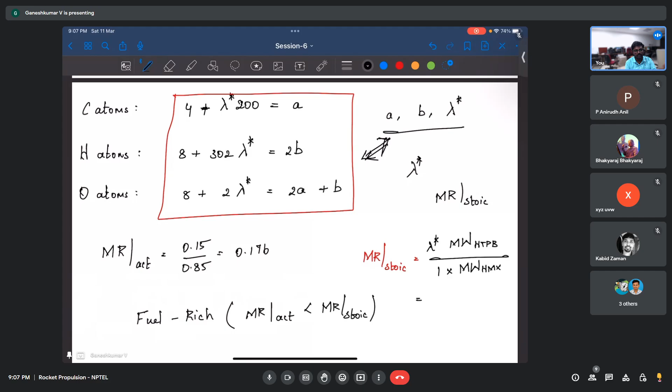That is the reason I added that question also in this problem. The basic underlying principle is you need to understand how the stoichiometric mixture ratio is calculated.

Is it clear, Anirudh? Yes sir. Did I confuse you? No sir, it's clear. Okay.

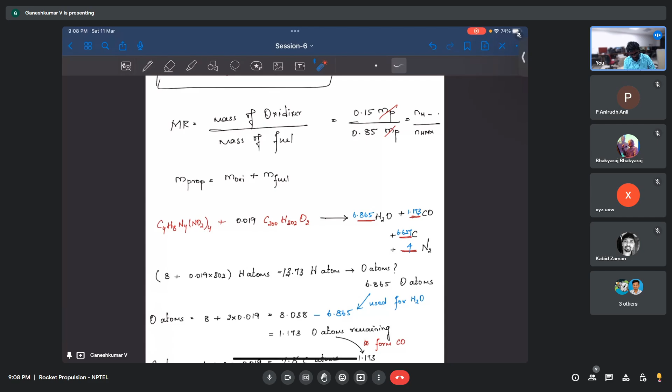So just by doing atom balance, you end up with the stoichiometric mixture ratio. You don't need any other approximations. But for a given mass ratio, you need to know how it reacts, and based on this reaction, find the number of moles of each species, and from that you can find heat of combustion, temperature - everything.